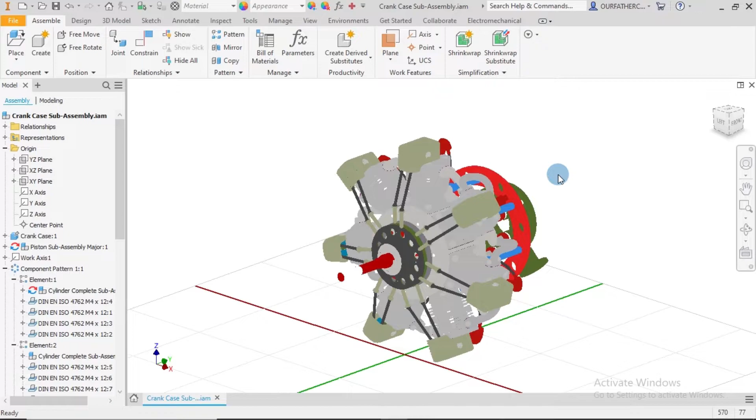Alright, so we head straight into this. If you notice here that these parts are already vertically aligned, meanwhile I expect that in your own project it's not yet vertically aligned.

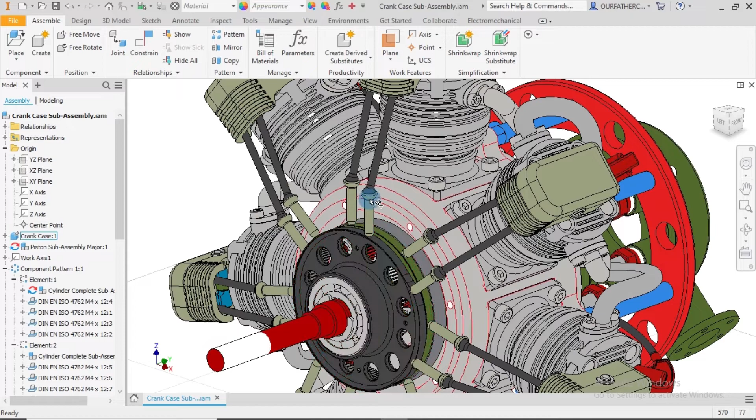This is something that I definitely did not plan for, because I already created the end of the assembly, that is, I brought the remaining parts, and I expected that when I removed those parts these would return to their previous position, but as we have it, they did not return, so they are this way, which was not the plan. However, you should not be bothered, because I don't think that should have any effect at all. It's just simply a change in alignment with what you probably have in your own project.

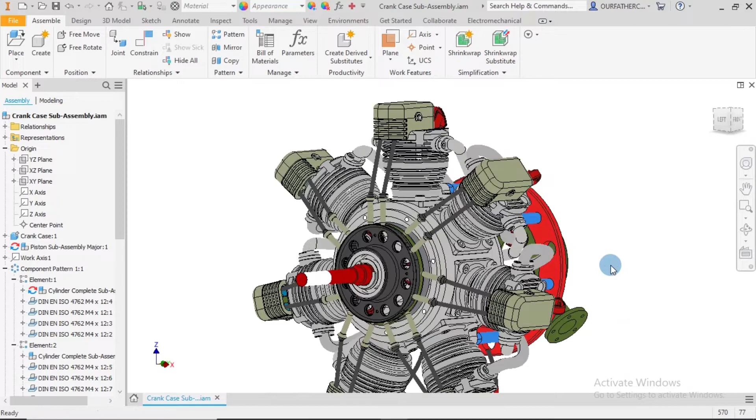Alright, so to quickly end up with all of this, the first thing that we will do is for me to bring in the parts to close up here, and that is going to be found under assembly files, and it is the cam housing sub assembly. So I bring this in, open, and place this here.

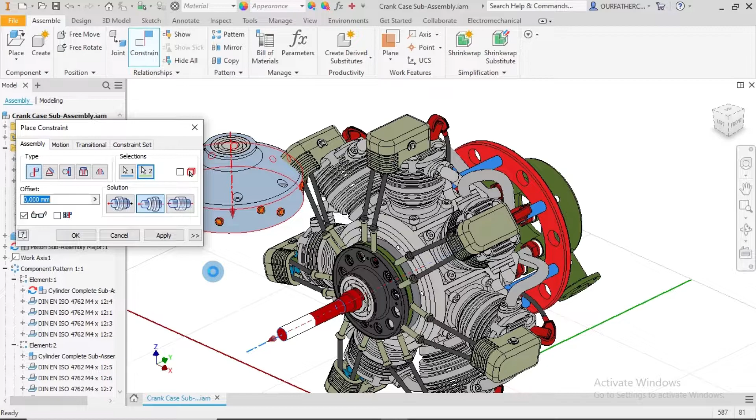We know automatically that our first constraint to apply is going to be the cylindrical constraint, so I apply that with this, and I select on this face here to apply the cylindrical constraint. Having applied the cylindrical constraint, I'll flip this over because the orientation is definitely wrong.

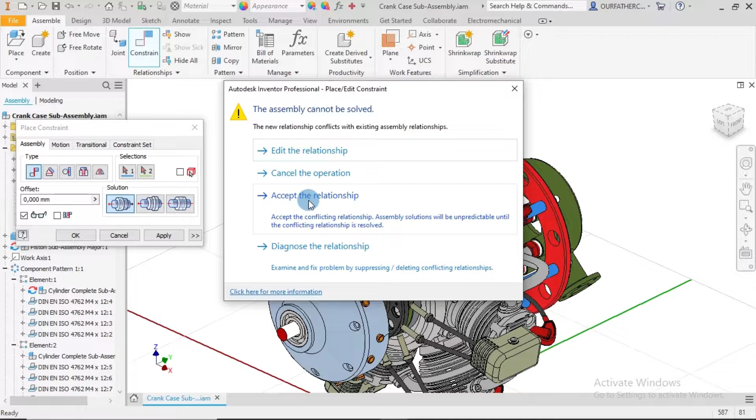Flip over. Please bear with me, my computer is getting slow, and that should be because we have a lot of parts here. When I apply this, it says assembly cannot be solved, the new relationship conflicts with existing assembly relationships. So I'm going to accept this. It says it would be unpredictable. So let's see, I've accepted that, but it's not showing any sick constraint here, so I'm just going to leave that way.

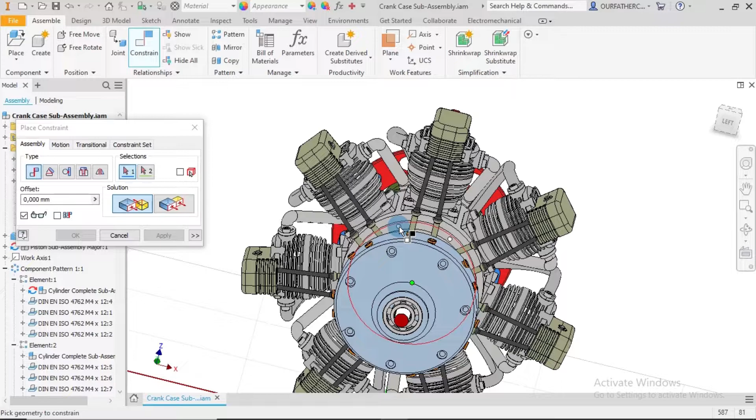The next thing for me to do is try to align one of these holes here to the hole on the crankcase itself, which means to one of these holes. So I come over here and select on this, and I'll pick on this for now. Zoom out, I expect that they are aligned. I click on alignment and apply.

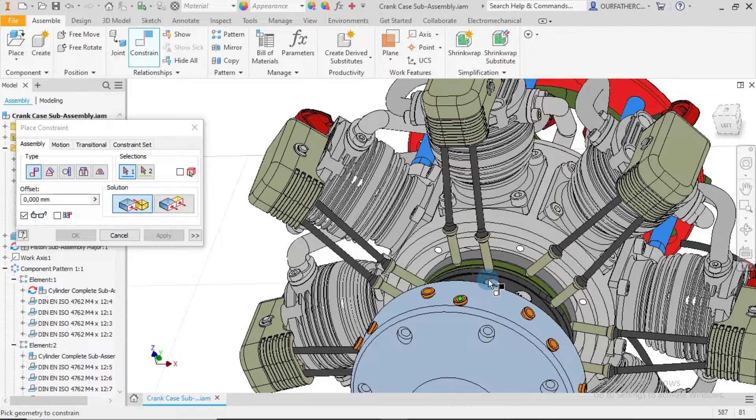Alright, so that's good. And then the next thing for me to do is going to be to close up these parts here. So I would rotate to see this face, select, and join that together with this face here.

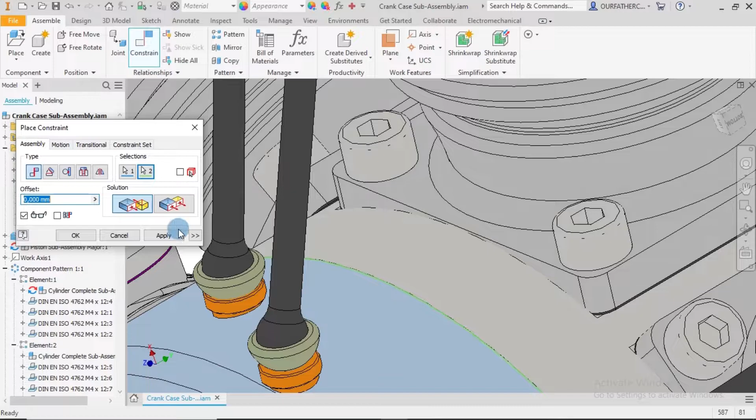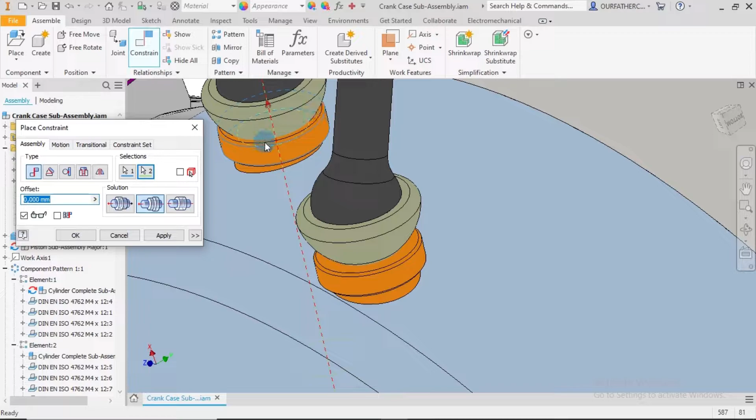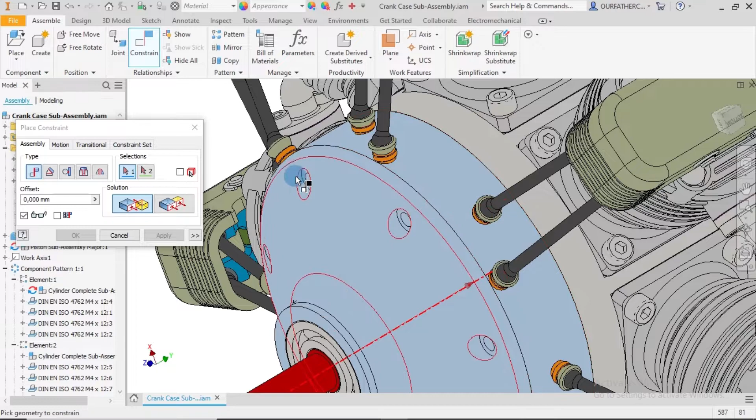When I apply this, what you should notice in your own project is that the relationship you apply here will be replicated on all corresponding rods all around the engine. The reason is simple: in creating these parts and placing all these cylinders, we did just one cylinder sub-assembly and then patterned it all around, so in that process we also chose to pattern the relationships.

That was done to save time, because if we hadn't done that, we would have had to bring in the rods one by one after patterning all of the cylinders themselves, placing them everywhere.

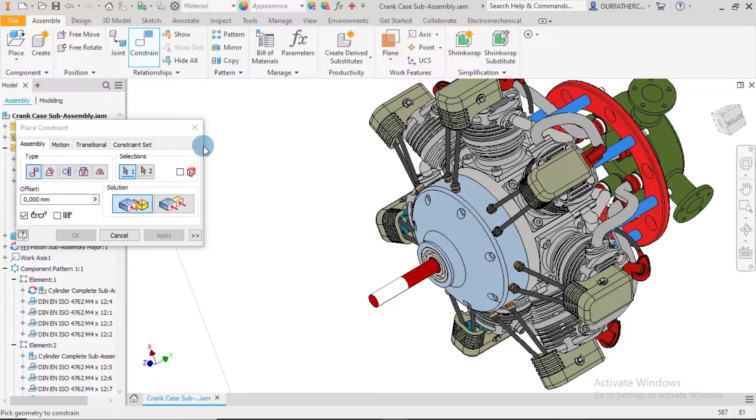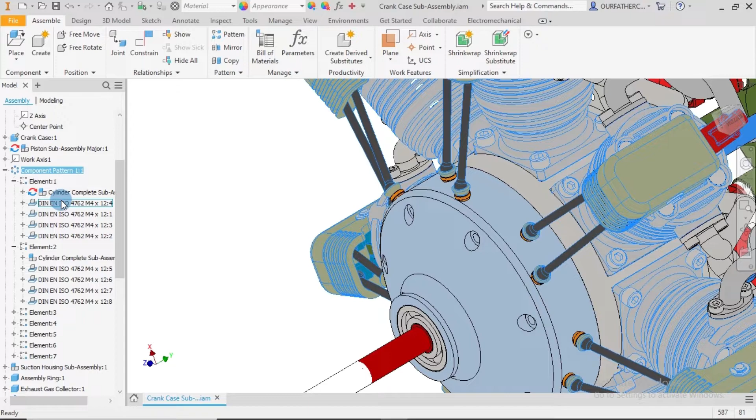Something important to note: before you place your constraint here, there's a possibility you might have an issue with that. In case the constraints do not work, simple - look for the component pattern in the feature manager, search for the first element, right click on it, and select adaptive.

It cannot be made flexible simply because we patterned them all around. No problem, but make sure your adaptive is selected before you apply your cylindrical constraints.

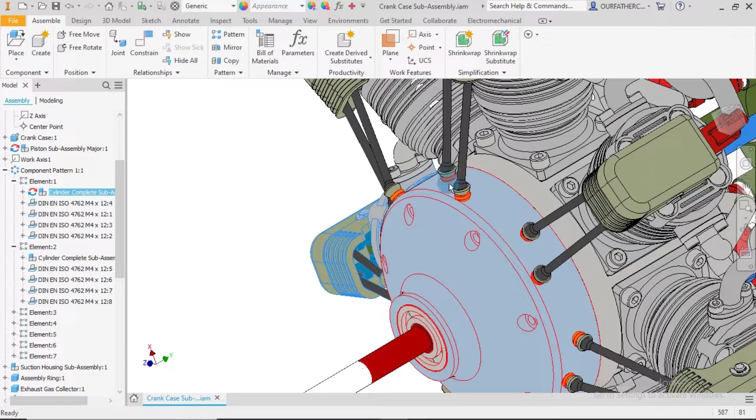So we do the same thing for the second push rod, and then this ram bearing - cylindrical constraint for that, and cylindrical constraint for the parts within.

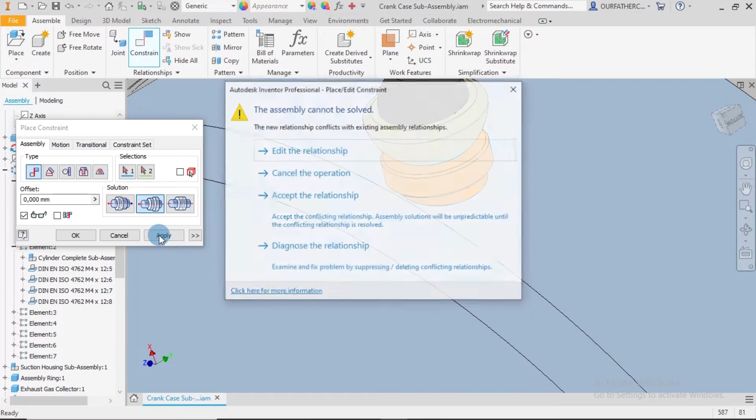And cancel. So if you've done that and selected adaptive for this part, you're going to have something that looks just like this.

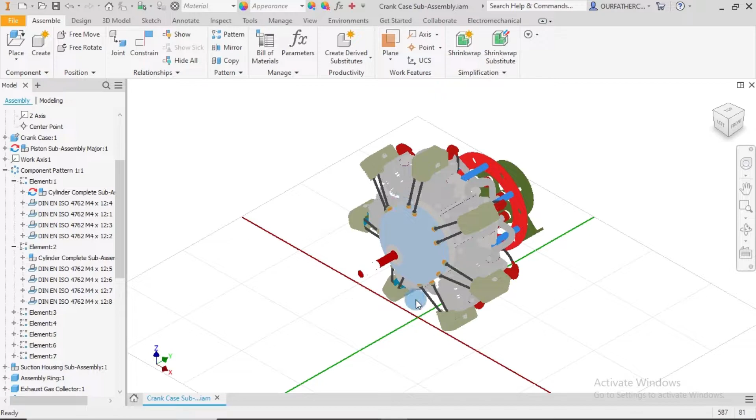That was not the ideal way to do this, simply because we tried to cut out time by patterning around, but in the process of creating an animation, you'd have to bring in these rods one by one. But this project has already been so long, so there was no need for me to elongate it any further.

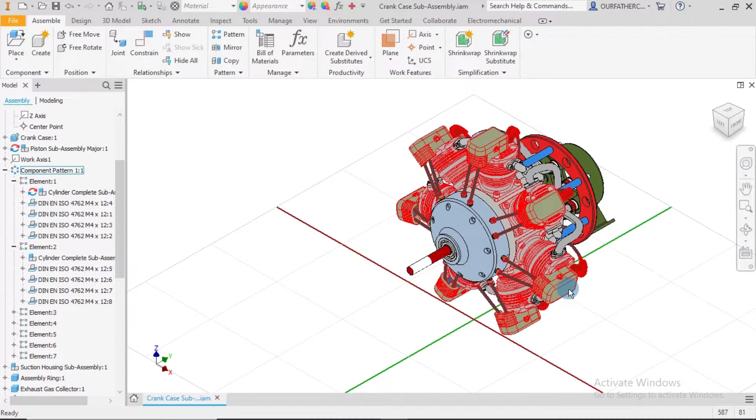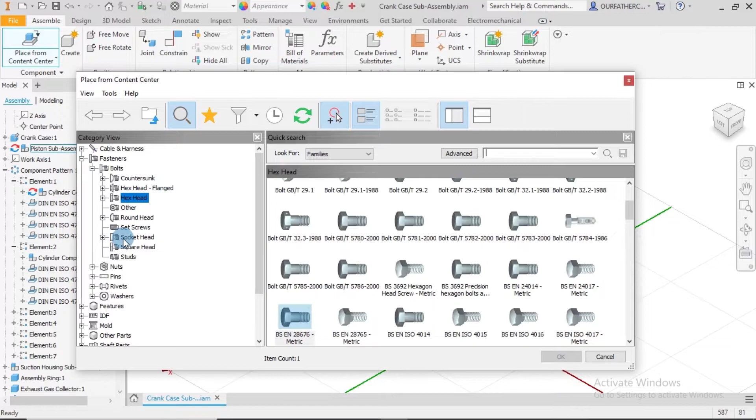So the next thing for us to do, now that this is done, is to bring in our bolted connections to fasten this cam housing to the crank. So I go over to place, place from content center, and then go over to socket head.

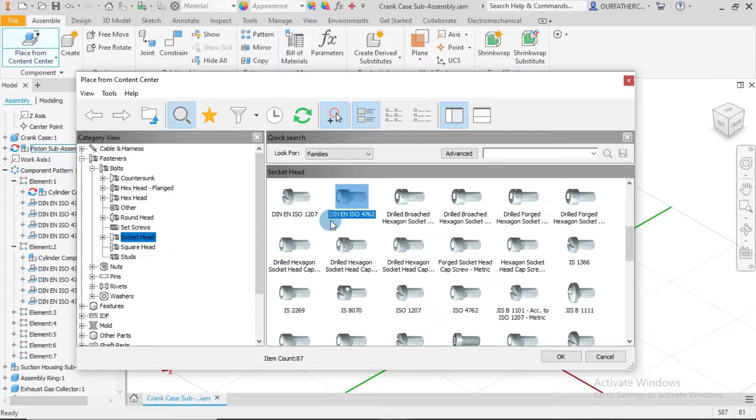Okay, and then I look for a DIN EN ISO 4762. I apply this, and then with the bolt in hand, I rotate to look for the hole inside the crankcase. I know I have the hole here, but we want this bolt to go all the way into the crankcase.

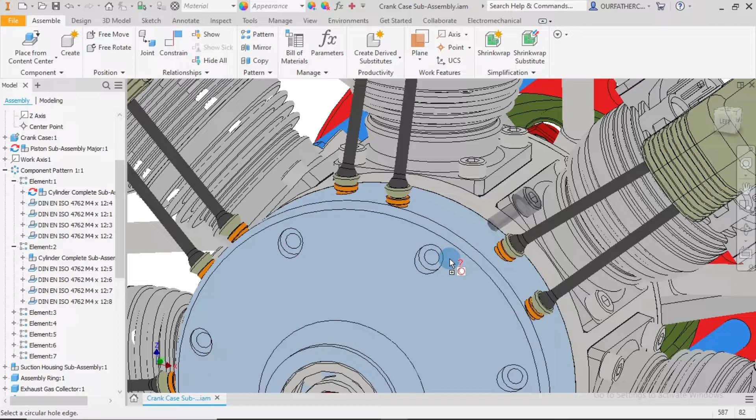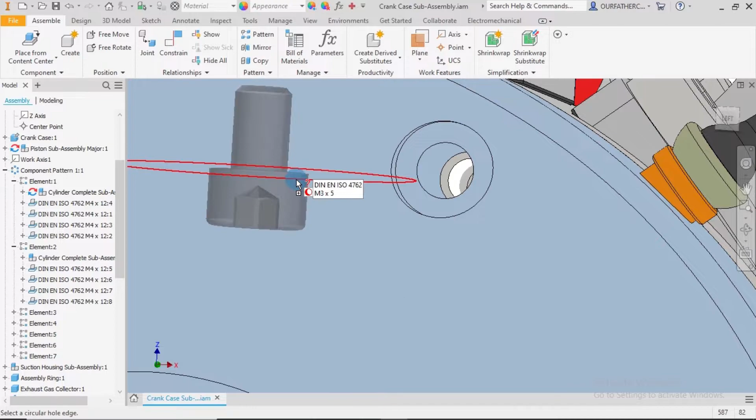So the hole I'd search for would be the hole within the crankcase. It's going to be a little tricky, but I'll just rotate. Remember, due to my own view settings, my threads or holes are depicted in white, so you might just see the thread if you're using the proper or normal view.

So I'll select the thread here, and then select this face out here to place this connection. So we have something like this. Okay, and I would say insert multiple.

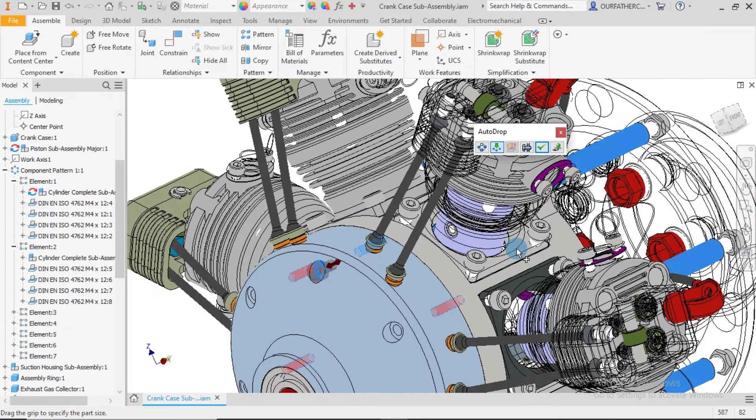The bolt should definitely be longer than this, so I don't know why it's showing this way, but we can see from guidance that the hole in the crankcase is as deep as from here to this point. So I'll just drag this, let's see, somewhere here to see how the bolt adjusts. Alright, so it's got up to that point - maybe I'll bring it backward a little bit.

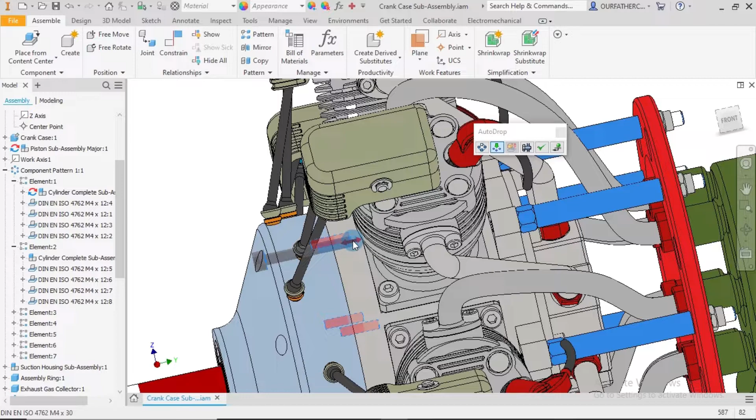I'm not very sure if this is the ideal way to do this, but it is what it is. So I'll drag this back just a little bit. Okay, I think this is just what I'm going to do. And I select on apply.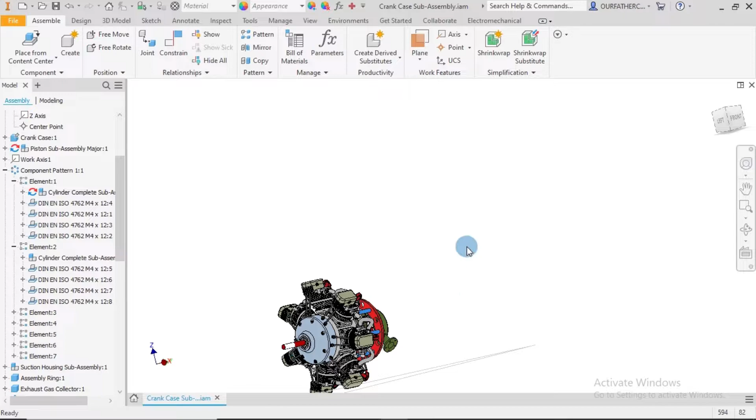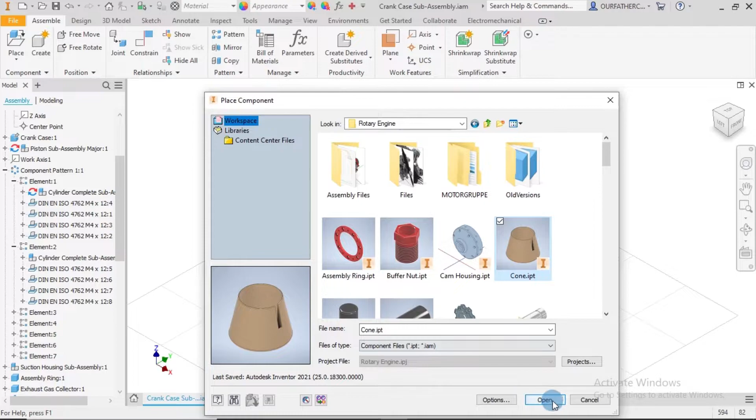Alright, with all of our bolts connected and locked, I'd select the escape button. Now we'll bring in the rest of the parts available under our rotary engine file folder, starting with the cone. This is how it looks, a very unique component. I'll bring this in, actually I think I'll just bring them all in at once. So let me bring back all these parts.

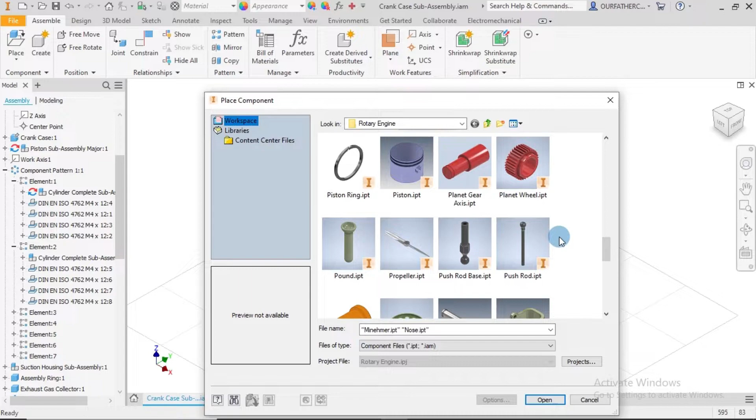I bring in this part called the Minehmer. I have no idea why that's the name, I think it's German but I'm not sure. I also bring in the nose, these parts, and I think the last part to bring in should be the propeller, but let me check to be certain. Alright yeah, that's all. Open and drop.

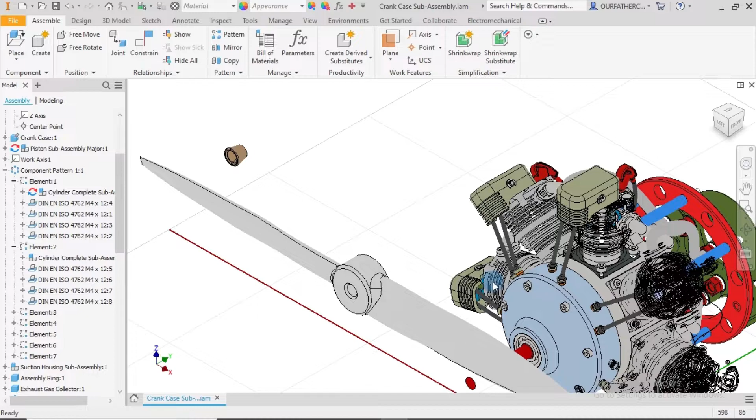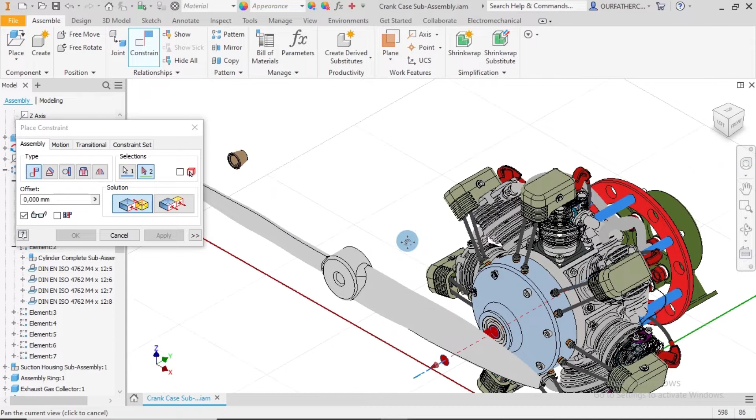Okay, escape, and then what we'll do first is place our cone here. I'll apply the very common constraint we've become accustomed to with this project, the cylindrical constraint, between this and this.

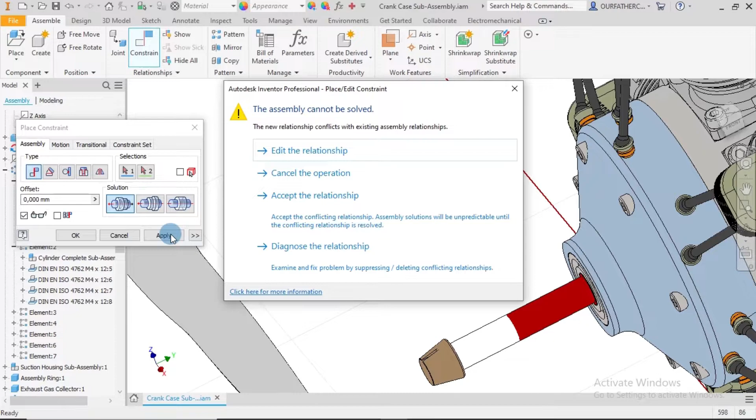Alright, let's see the orientation. So it's facing this way, but that's not what we desire, so I'll flip this over and apply. Yeah, just accept this relationship.

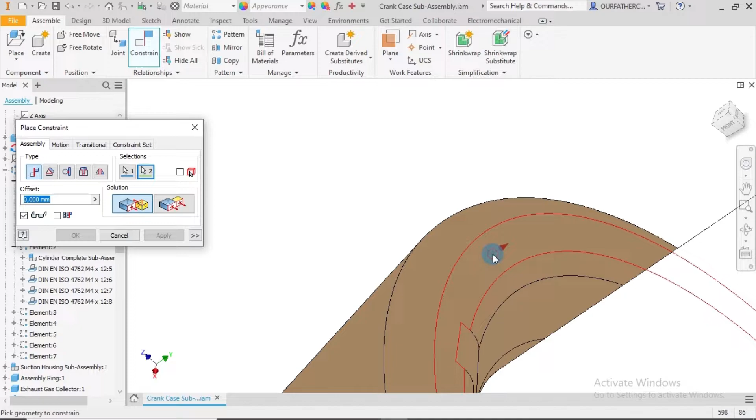Alright, with that I'd place a constraint between this face here and the rear part of our cone here. Okay, so that's that, and I'd say apply. Alright, let's see.

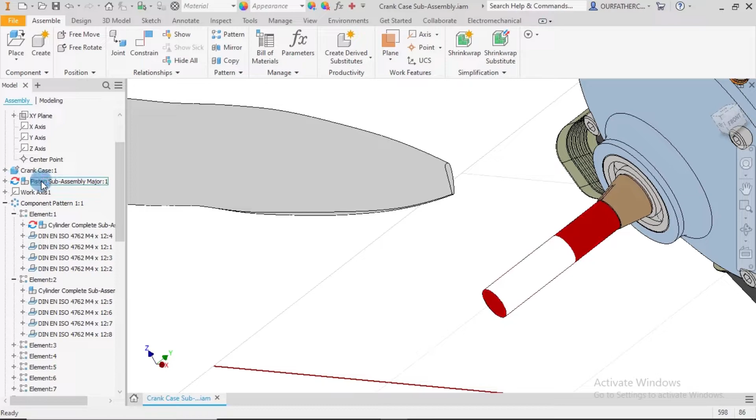I'll cancel this. I go over to this, should be our piston sub assembly, and make the mid plane visible for us to see, and that should be the YZ plane. I'm taking my cue from here. I'd make the YZ plane visible, right click and select visibility.

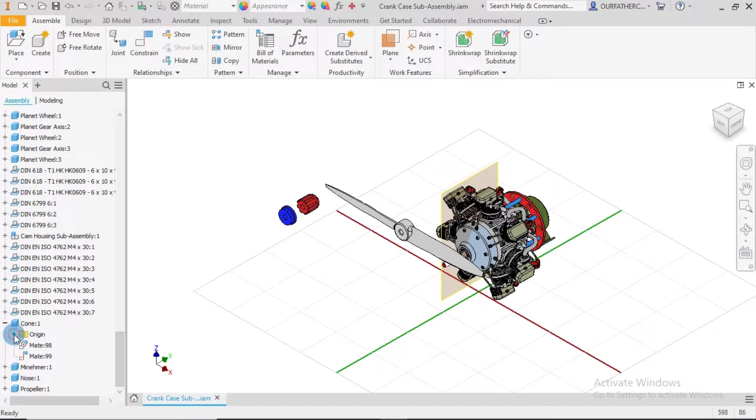Then I scroll over to the just brought in cone to make the same plane visible. Let's see, we have to be certain. I'll drag this away. Okay, scroll in.

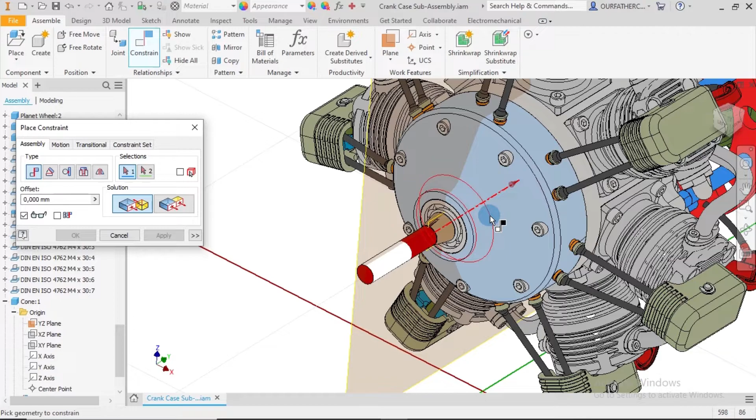Alright, so the YZ plane also, I make this visible. Then I apply my constraint between the both of them, and the reason is simple: the idea is that when the shaft rotates, this cone also rotates with it. So I'd place a constraint between this plane and this plane, make that flush, and apply. Just accept. Alright, so with all that I can cancel this and make the planes invisible.

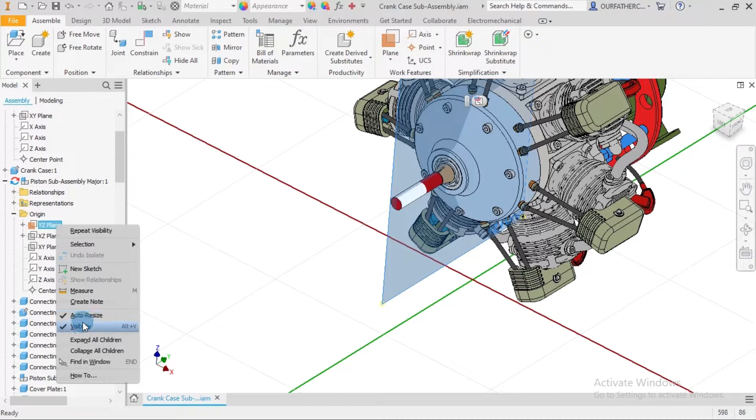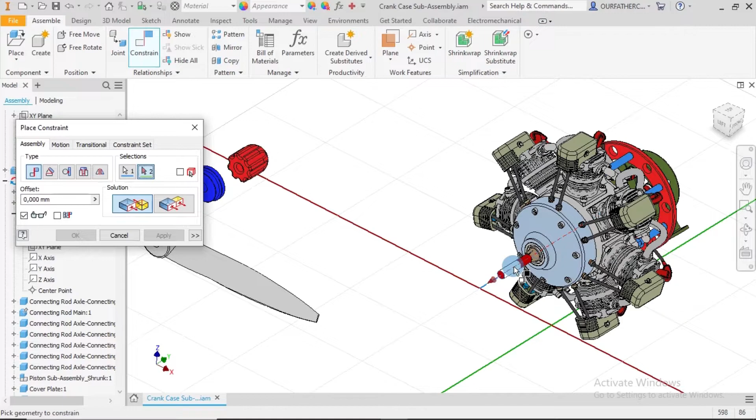Don't mind me, I think you might be able to hear my mouse scrolling. Alright, so we have this, and then the next thing we'll do is bring in the Minehmer and place it here. So I go over to constraint and apply the cylindrical constraint again between this shaft and the Minehmer here.

Alright, so if you notice, in the Minehmer it seems like we have something like a cone shape here. This has a larger diameter, this has a smaller diameter, and this simply depicts that this fits into this. So what we'll do is I'll flip this over, and having flipped it, I'd apply, accept the relationship.

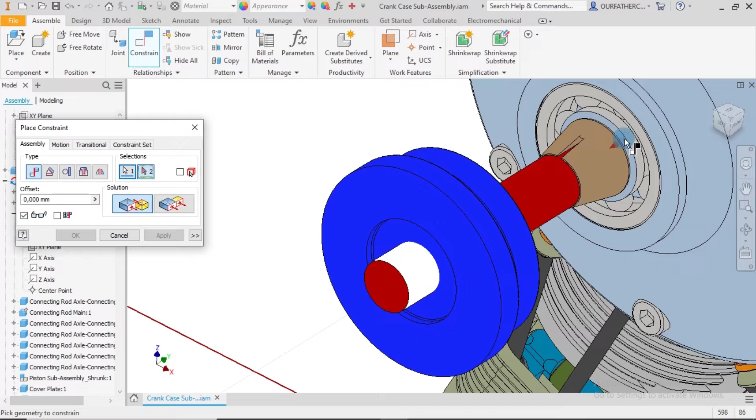Then I'd mate also this face here of the bearing to the rear part of this Minehmer. I'll scroll this way and apply to this. Alright, so I'll apply.

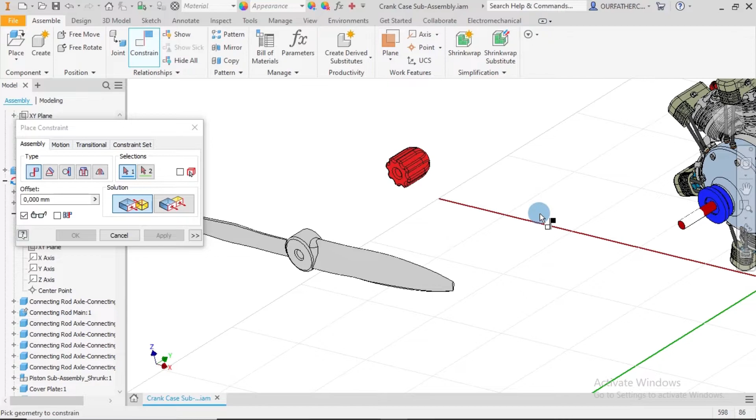Alright, then our next part would be to bring in our propeller. So the propeller is here, and if you notice, if I scroll this way, we have something like a groove here, right? I don't think it fits in perfectly into this point.

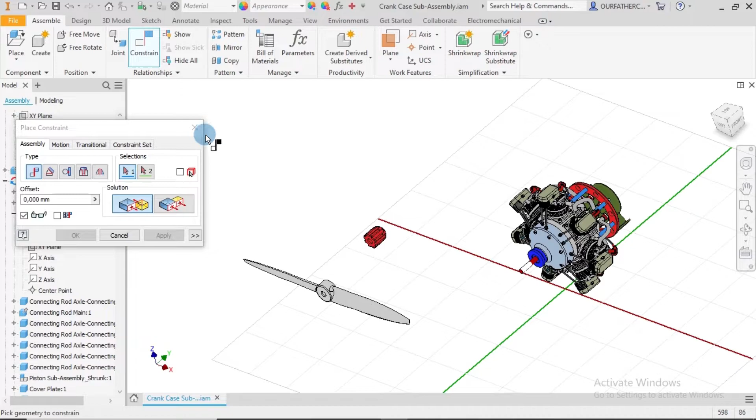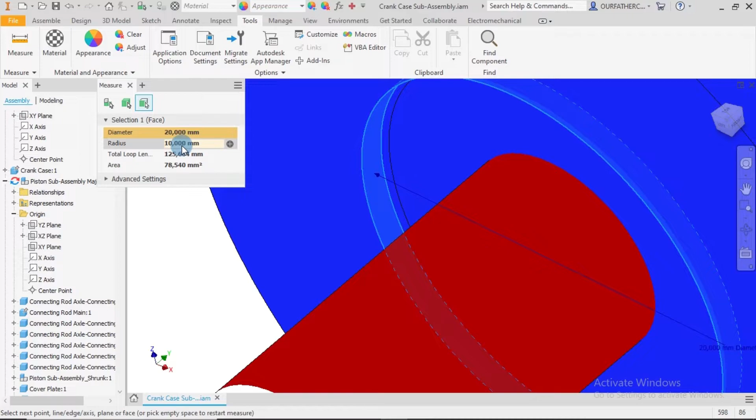This is due to the fact that maybe the drawings used were not accurate, but that could easily be changed. Let's see, if I measure this, choose measure, from this face to this face, this is 1.5, okay, and this is 20 millimeters in diameter. Alright, if I check through with this also, measure, expect it to be 1.5, okay, and this is probably not 20, yeah, so this is 16.

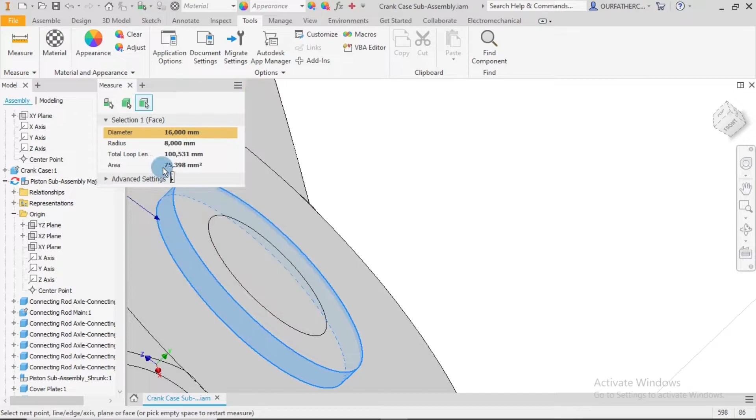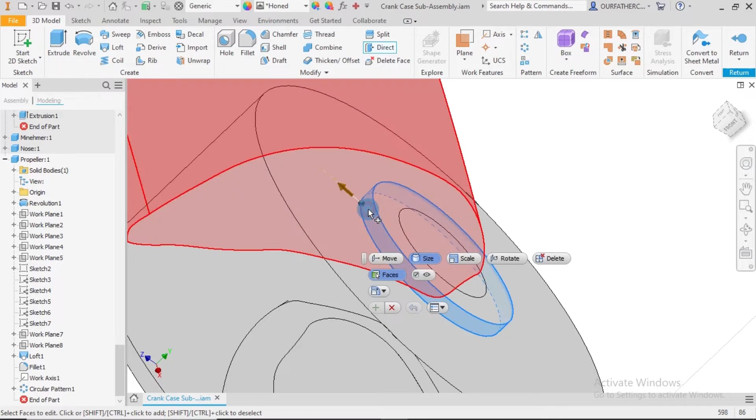It can be adjusted. Simply, I'll right click on this part, say edit. Alright, we are in this part workspace. I'll go to direct, size, select on this outer diameter, come over here, and change the diameter from 16 to 20.

Alright, 20, and I check this. So that was really simple. I cancel, return. The truth is that these things are part of design.

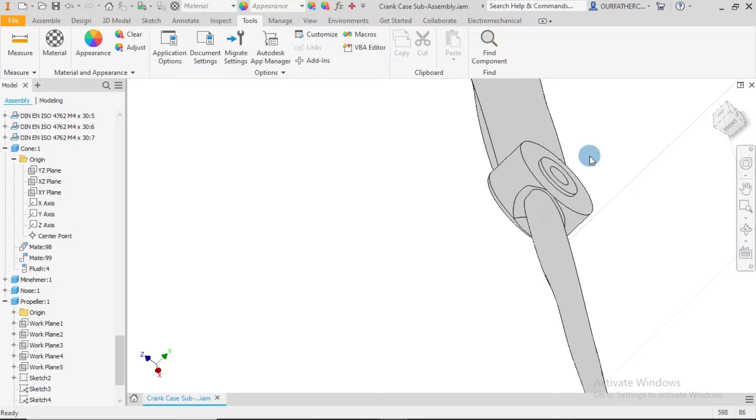Dimensions are always something that we have to look out for. So there is a high probability that in creating something as large as this, some dimensions would be conflicting. It happens. So I go back to assembly and place our constraint.

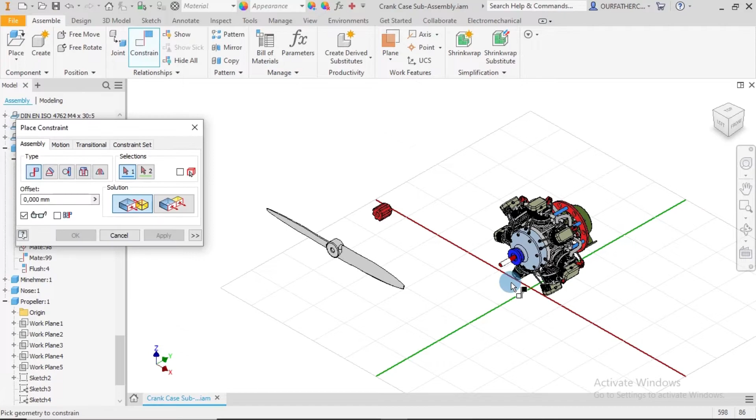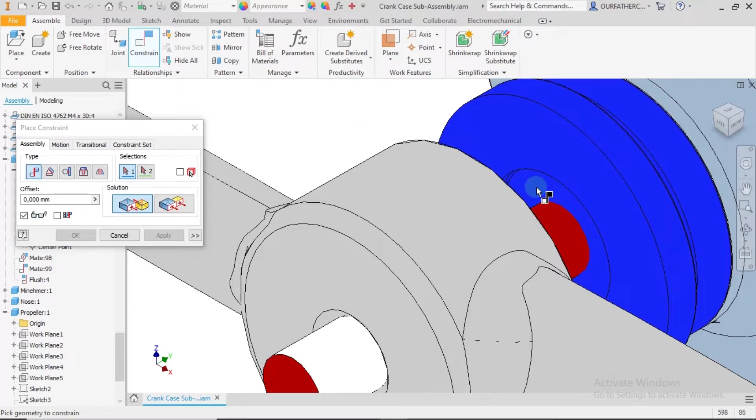So this is going to be between this, and we place with this. Alright, let's see. Okay, so this is good. And then I place the constraint between this face here. I rotate and this face. Alright, so with that, apply.

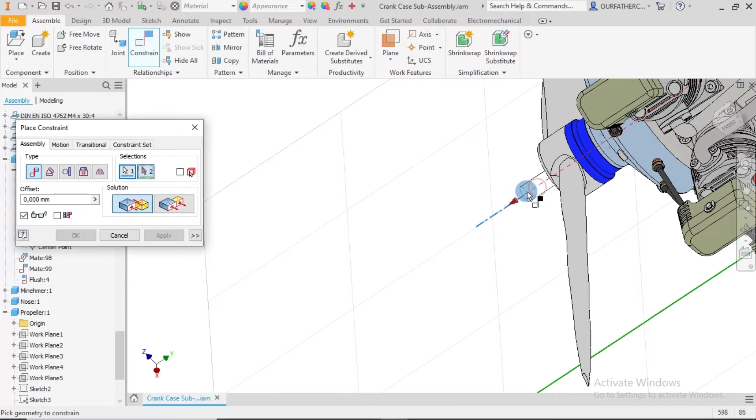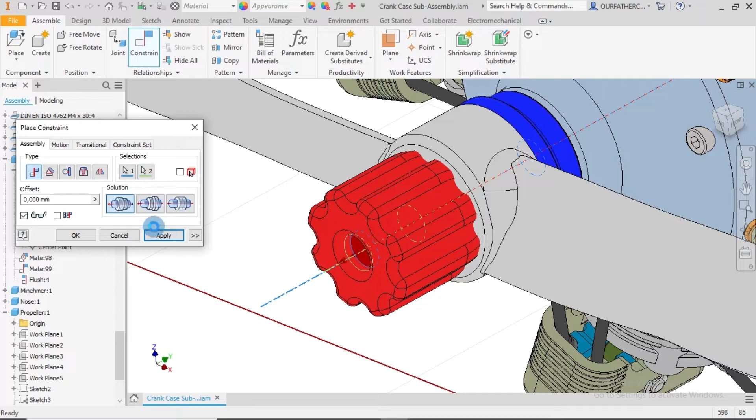Perfect. And our last constraint is going to be this cylindrical constraint together with the cylindrical constraint of our nose. Where is it? Okay, so it's here. Definitely this is the wrong direction, so I flip this over and apply. At this point in time, I'm glad to tell you we have just one more constraint to apply.

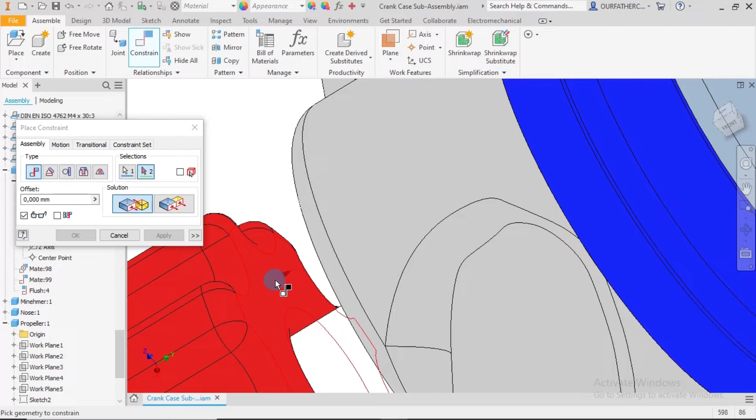I place a constraint between this face. Let's rotate this and place with this face here. Oh, voila. Alright, and I apply. Cancel. Alright guys, this is pretty good.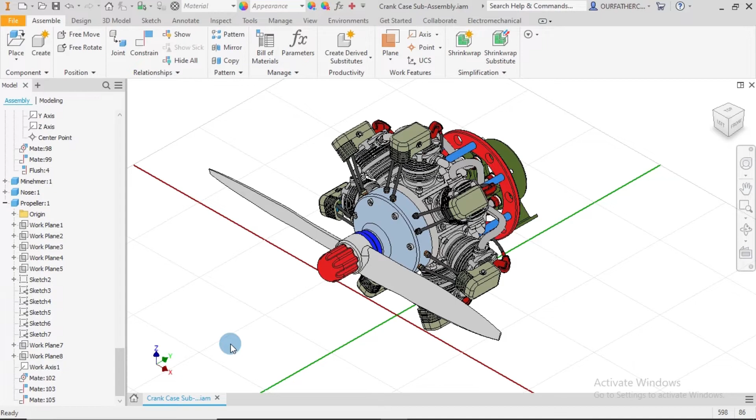I would say impressive. And I'll say the only downside to this is that it was really long. And okay, that's not the only downside. Another downside is that we had to do a lot of modifications to this project, to many of the parts. It's possible we could have eliminated that process by using, as I said before the assembly procedures began, the procedure called the skeleton modeling approach. But since we already had the parts and trying to create everything together, bringing in all the parts complicates the whole process. So I thought it's kind of better to create the parts separately and bring them all together. Hence the reason why we had some misfits and had to do some modifications.

Alright guys, I think there's one more thing to change or apply, and it's going to be the constraint between these. I'll right click on visibility for this. I'll do the same for the nose, the same plane, this visibility, and lastly I would go over, or I could just use the cone because the cone is already aligned to the crank sub assembly or the plane.

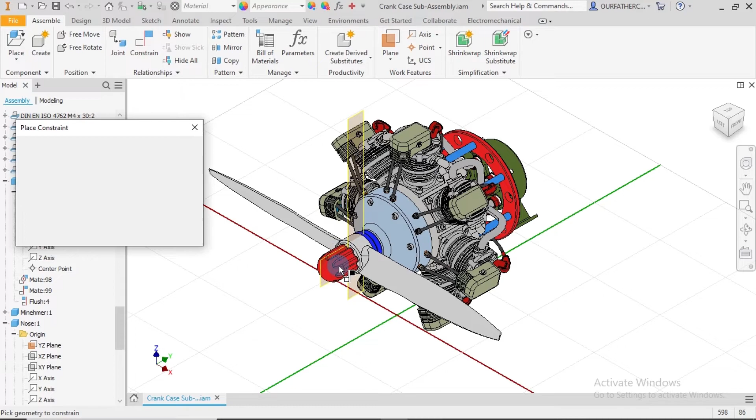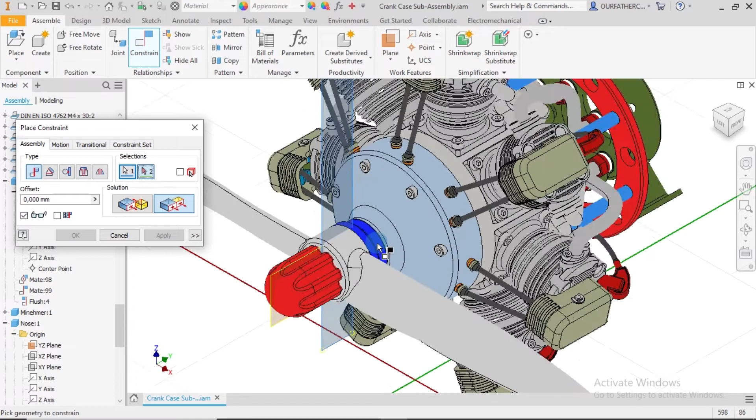So what I'll do is I'll just place constraints. Ideally I place constraints between these planes so that when one rotates, the other part rotates with it. Apply. And lastly, I'll place, let's say, between this plane and where is the plane for the cone. So I think I can just select it here. Alright, so apply also. And that's good.

So now we are really done. No more constraints to apply.

So guys, I hope you guys have enjoyed this tutorial so far. I hope I have not bored you all through the process. My plan is that after this I will try to create a rendered image of these parts, of this assembly, and then as time progresses I would see if I would be able to set apart time to actually create an animation for all of this. But in the meantime, this is where we are going to be stopping with this tutorial, and I seriously hope that you have enjoyed it.

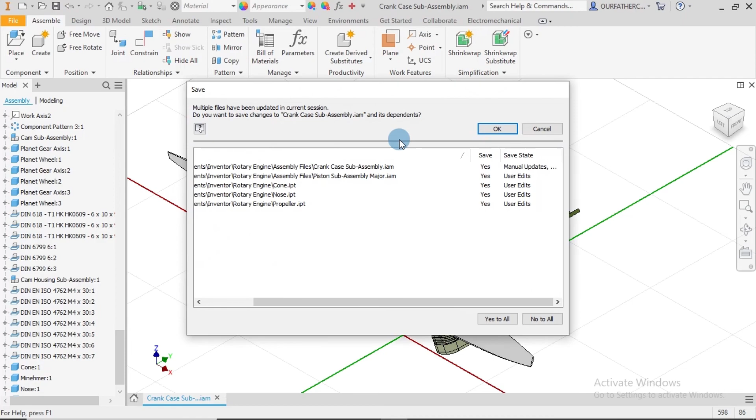I'll go ahead to save my parts, and yeah, let's see. I suppose I would also like to see how it looks when there is a shadow involved with it. Alright, looks pretty nice.